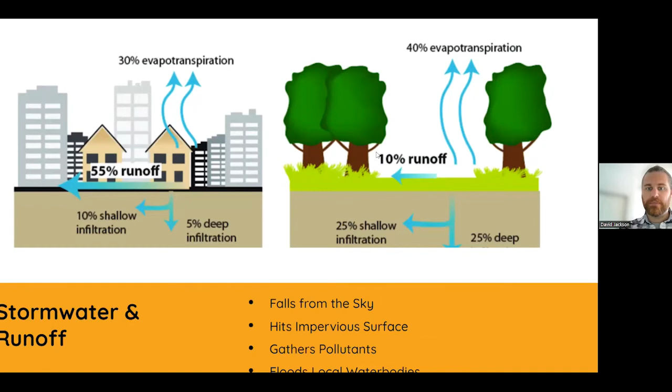We're going to talk a little bit about how rain, which you would think of as really clean water, leads to water pollution and issues with our fish habitat. Right? Okay, so as I was saying, we're going to talk about water quality, and we are going to talk about how rain, which you would think of as extremely clean water, does contribute to a number of issues, including pollution and degradation of our waterways.

There's sort of two general models for what happens when rainwater hits the ground. It shouldn't come as a surprise to anyone that water falls from the sky. That is rain. We collectively call any kind of precipitation stormwater. So that is hail, sleet, snow, rain. Doesn't matter if it's a light drizzle, if it's condensation from clouds, or if it is a very intense downpour.

If it strikes a natural system, there is very little runoff. Runoff is what happens when water moves sideways as opposed to either being taken up by plants or going into the soil. The majority of water goes into the soil in a natural system. A small amount goes over the ground, usually where it eventually sort of runs out of speed and then is absorbed by plants. A large amount goes up through evapotranspiration. Evapotranspiration is a very fancy word to say it is taken up by plants or it is released into the air.

If you have any questions on terminology, I will try to explain them as I go, but if anything is unclear, please do go ahead and ask. I'm happy to clarify any of these terms.

David, before you continue, if you could speak just a little bit louder, it's better than when we tested, but it's still a little quiet. Okay, I will do my best. And if my neighbors complain, everyone on this call has to be my ally. Online is really challenging for me because I can never tell if my jokes land. And that is really the biggest challenge, I think we can all agree, of the last few years.

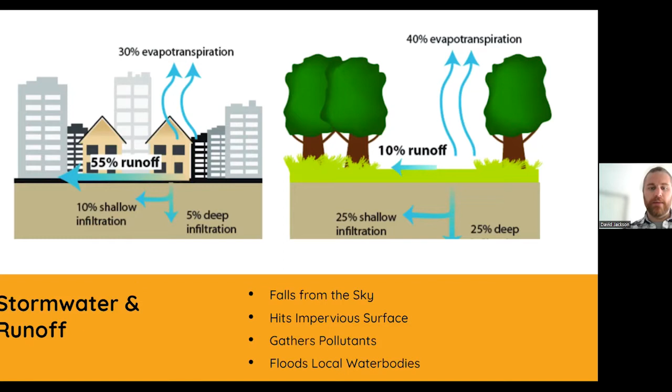All of these also carry certain pollutants. These can be feces from dogs and pigeons. This can be oil or tire rubber from your car. It could be sidewalk chalk. It can be any number of things. But as the water moves across the surface, it picks those elements up and then it deposits them in local water bodies. So to go in a little bit further, in an undisturbed watershed, this is a better model.

And you see a large amount of evapotranspiration, the majority of water going into the soil and a small amount of surface runoff. We want that, but we specifically want the water to move through the soil and the subsoil, and enter what's called the groundwater. When water gets down to the point that it's deep soil or shallow soil water, that means that it is still going to enter these waterways and recharge them, but it's going to do so while it's moving through soil.

And as you see there, soil has a lot of stuff going on in it. For the sake of water quality, what it means is that the stuff that's going on in there is cleaning it. The soil, just the physical structure of the soil itself, the insects, the invertebrates, the detritivores, they're all cleaning the water before it enters a water body. It goes into the groundwater, it gets cleaned, and then it enters the water body. Once it enters the water body, the stream or the lake that's there, it means that it's a better habitat for the fish that we're trying to protect.

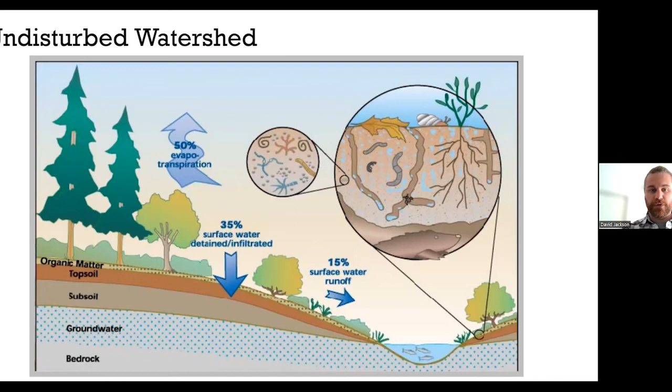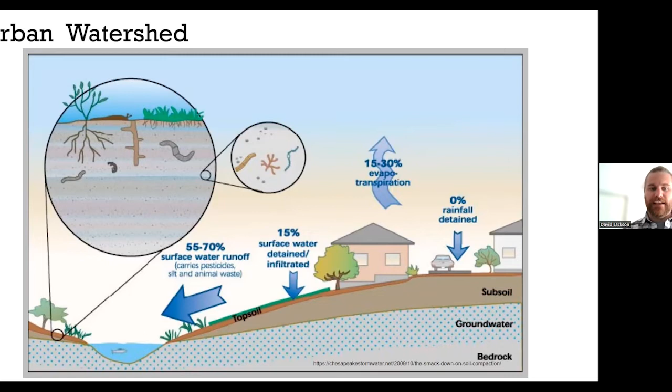When that doesn't happen, the majority of the water that is entering the water body is doing so through the surface. It's not going into the groundwater and recharging, it's going over the surface and directly into the water body. When that happens, all of those pollutants that we talked about just a second ago are being carried with it into the water body. And there's a number of different pollutants and types of pollutants that we're going to talk about, but all of them have different negative effects. And even small amounts overall lead to negative impacts for fish habitat.

So stormwater has a lot of problems, and I'm not trying to bum you out, but there's sort of four major ones that I want you to hold in your head when you're thinking about why does it matter that we manage stormwater. The first one is flooding. This occurs when there's just no place for water to go. Storm systems can get overwhelmed. They're essentially gray pipe systems. And if they get filled up, or if the water reaches a point that they can't flow out, you're left with serious flooding. This is something that we are starting to see in this area more and more, especially as climate change means that we have a much wetter wet season and a much drier dry season. We don't have the snowpack as much. We have a lot more heavy flooding events.

Soil erosion is exactly what it sounds like. It's when a lot of fast moving water starts carrying soil away. This is another reason that we want water to go into the soil and move laterally through the system. When it moves over ground, if the ground isn't held in place by grass or plants or some other system, it will just carry that soil with it. We have a saying at SCD: water always wins. If you don't believe us, ask the Grand Canyon.

Water is really great at moving large amounts of soil, and large amounts of soil in our waterways is a real problem. In addition to pollution, it also means that bluffs come down. And the vast majority of this state, or at least this side of the mountains, seem to be built just right on bluffs that are being eroded. Pollution, as we just mentioned, here's a very dramatic picture of a lot of oil and things going into storm drains.

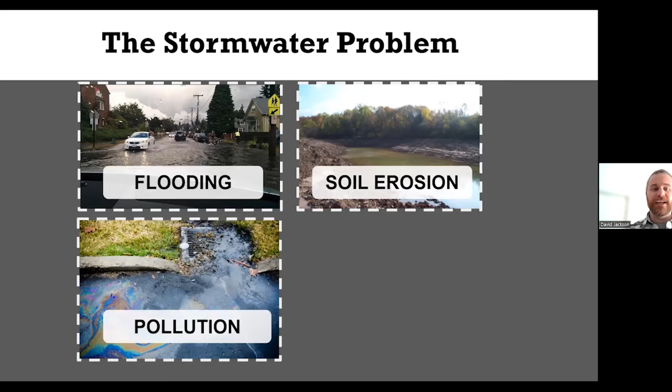That's probably something we're all used to seeing. The problem is that storm drain, there's probably not filtering between it and a water body. So whatever that water is carrying, it's going to end up in a fish's habitat.

And then less groundwater. This is more of an issue east of the mountains, but this is still an issue for a lot of our farmers over here, who we very much want to support because they're growing food for us. The more runoff we have, the less that recharge effect I was talking about earlier. And the less recharge, the less groundwater, meaning it's harder and harder for wells to work and irrigation based on wells to work.

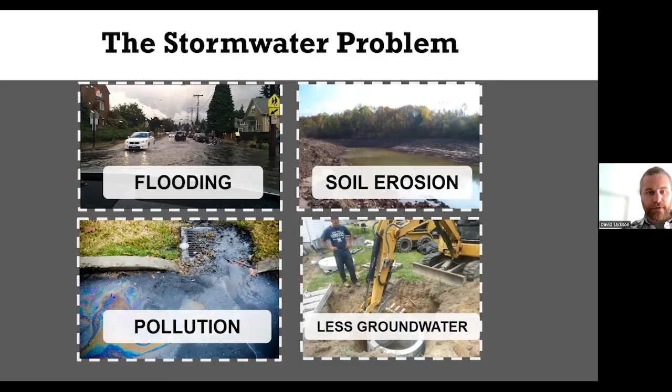So that's a lot of bad news and a lot of bummer stuff. But we're going to talk about a couple of things that you can do to actually help solve this. So it's not all gloom and doom. The first one we're going to talk about is green stormwater infrastructure. This is commonly shortened to GSI.

This is a way of mimicking a natural watershed in a very, very small area. You're not trying to completely reforest a town. You're trying to concentrate the same effect that a forest has in a very small area. You commonly probably know these as rain gardens. You also might know them as bioswales. There's a lot of them out here in the state.

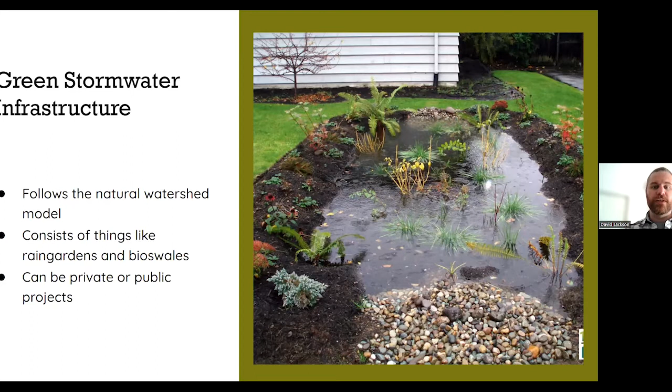These can be private projects. They can go on in your yard, or they can be public projects that happen at a municipal or even a state level. We're going to talk about the stages of construction because I think what a lot of folks are here to talk about is not necessarily just how a rain garden works, but specifically how to put a rain garden into practice.

The first thing that you're going to do is you need to excavate, then you're going to backfill, then you're going to add wood chip mulch, and then at a later date you're going to do planting. And I'll talk about why that happens later.

There's an old joke that we used to say when I was a private landscaper about government work, which was bring in the ditch digger and the ditch filler. This is actually more or less what we're doing. You're gonna dig down to a certain level, and you're gonna backfill it with soil. But you're gonna backfill it with different soil. And when we get to the backfilling section, I'll talk a little bit about that soil and how it works.

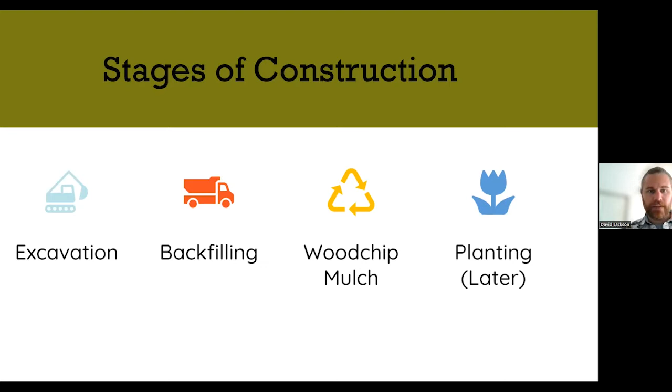And then you're gonna add a protective layer of wood chip mulch. There's a reason we use specifically wood chip mulch that I'll get into there. And then the planting is also very specific. So excavation. This is what we call the typical bean shape of a rain garden. There's not a really good reason to make it this sort of figure eight or infinity sign, but this is a very common shape just to help make it look natural.

You'll notice that this is a fairly deep hole. This is about, I'd say, maybe about 24, 26 inches down. And very critically, you'll notice that the soil changes color as it goes down. You want that. The reason we want that is because we want to get the garden low enough that when the water enters it, it's bypassing a lot of the topsoil that may cause it to pool laterally. And instead, it's trying to infiltrate down into the soil.

So we're trying to fast track the infiltration process by getting the water down to the base soil as fast as possible. You'll also notice, if you can, that the texture of that soil seems very loose. You want the bottom to be a little bit scratched up.

Same thing as getting it low. We want the water to be able to infiltrate deeply into that soil very, very quickly. You're also going to notice that there are two trenches at either side. Those are for the downspouts. In fact, you can see on the right one, they're up at the top. You can see where the downspout ends, right above it.

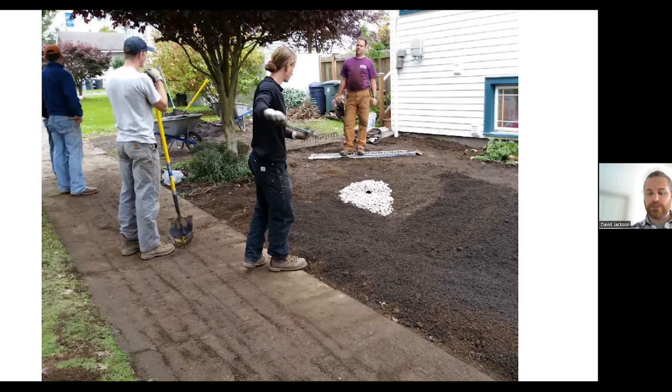Now you notice the white splotch that's there. The pipe I was telling you about earlier, that's where it ends. The rock is around that pipe to protect the pipe from plants getting in, from weeds getting in, but also to act as a kind of energy dissipator, so that when water enters the downspout and flows through the pipe, it hits the rocks first and it slows down, and then it seeps into the garden instead of rushing into the garden and possibly disturbing the soil. So that's the backfilling step.

After the backfilling step, we cover the whole area with wood mulch. You can see again those two outlets. The rock has been washed now. I think this is right after a rain event, actually. And you'll notice that there's a dark area around the middle of the pond. That means that the pond is wet and is currently holding water, and the water is in the process of infiltrating. So this is a garden without plants. Don't worry, it doesn't look like this all the time. But this is a garden without plants, and it is already doing its job.

This wood chip that we use is a specific kind of wood chip called animal safe hog fuel. It is also approved by Department of Ecology.

I was about to make a joke about, I promise I'm not paid by Department of Ecology, but I absolutely am paid by the Department of Ecology. I am here doing this presentation because I'm paid by the Department of Ecology.

So we tend to use their products, but their products are also just the best for this. I can get into a lot of detail as to why we use this specific mulch. If anybody's interested, I'm happy to answer questions about that. The bottom line is that it is the best version of wood chips to use for this process. And if you want to use something else, you have some things you need to consider.

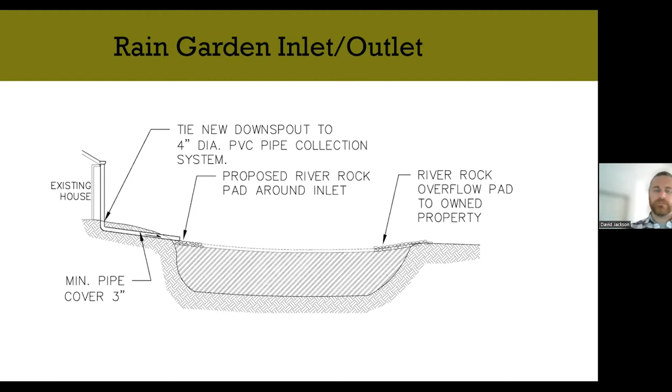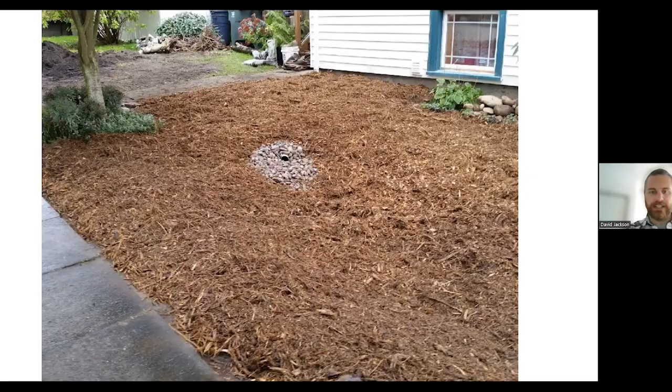This is a closer shot of the inlet that I was talking about. And again, the rockery is here to both protect the inlet, but also to make sure that the energy dissipates as it's coming out. There's also a little bit finer detail you can see on the wood chips and how they sort of form that mat so that they don't move. You're gonna have a really hard time pulling one of these strands of these wood chips out of this big pile because they're all interconnected in this matrix.

A couple things to note about offsets for anybody who's actually going to be doing this work. You want them to be 10 feet from buildings, 5 feet from utilities, 50 feet from a slope, and you want them to be outside the crowns of trees. I mention all of that because very commonly somebody asks us for a rain garden, and they've already fallen in love with the idea of putting it in a specific spot. And we get there and it's not going to work. It's too close to the building, or it's on a massive slope, or it's directly underneath a crabapple tree, or, and this happens too, we call 811. It turns out there's a gas line running through the middle of it.

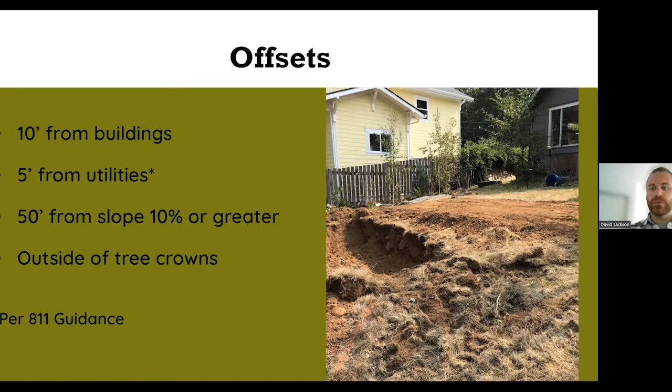So when you're siting your own rain garden, you want to have it away from your house. You want to have it fairly level. You want to keep it out of the right of way because you need to get right of way permits if you do that. You want to keep it away from trees. It needs to be out big and exposed in the sun. You also want the spot to be very dry. And you want to make sure that you have access to at least one downspout that will be able to run from your house directly out to where the rain garden is going to go.

David? Yes. Sorry, quick question before we get to the question answer break. One of our attendees is asking if you could talk a little bit about bioswales before we get to rainwater catchment.

Yes, I'm going to talk about a bioswale in the context of this picture you see here on your right, because they are almost functionally identical to rain gardens with a couple specific changes. A bioswale does not necessarily have an inlet or an outlet. What it does have is a slope. You're still excavating, putting in bioretention, putting on wood chips, and putting plants in. But a bioswale is not meant necessarily to hold all of the water in place. A bioswale is meant to infiltrate water while it moves it somewhere else.

So the most common version of a bioswale that you'll see is a drainage ditch, which I think we're all familiar with. Water comes in and sloshes sideways and goes on down its way. Retrofitted, you excavate a few inches down, you put down bioretention, you put down wood chips, you do some planting, and now instead of that water moving very fast and discharging somewhere else, the water enters the bioswale and infiltrates as it is moved off to its next place.

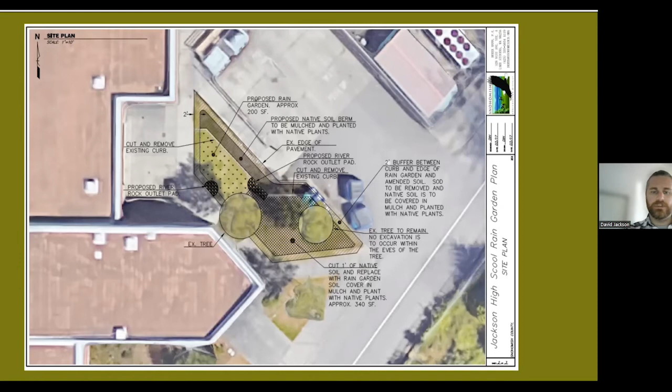So now we're going to move on to rainwater storage. Rainwater storage is kind of not really the opposite, but it's a very different way of handling stormwater. GSI is about getting rid of stormwater and putting it back into the natural system. Rainwater storage is about hanging on to stormwater, treating it ourselves, and using it for different things. The most common version of this is rain barrels. I think a lot of people have seen rain barrels. We're going to see some in this presentation, but they are kind of the dollar store version of stormwater catchment.

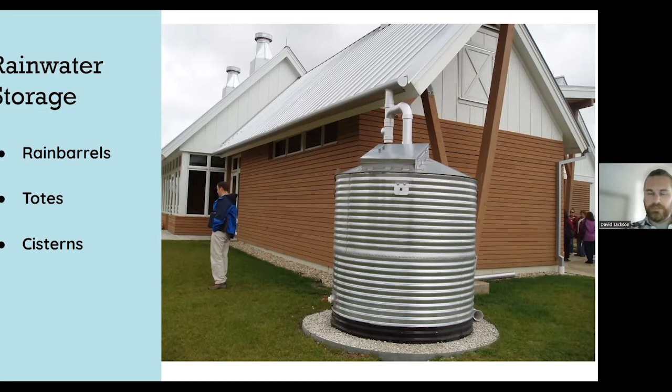Totes are a little bit different. You may have seen IBC totes. They're larger, they stack. Some people find them really cool looking. Some people think they look terrible, but they're kind of the next step up. And then there's cisterns. This is an extremely expensive cistern. These sort of systems are now very expensive because they're very trendy. They also look incredible. But a cistern is basically any system about 500 gallons and up. They can be above ground, below ground. There's just kind of no end to them. They can be fairly inexpensive to bespoke, absolute monuments to money in certain cases.

The three main elements of using rainwater are how much you're going to use, when you are going to use it, and how much head pressure you're going to be able to generate to use it. The amount has to do with the size of your system, but also the size of your capture area. A lot of people want to get a really big system, and they go, "This is great. I'm gonna get this enormous system," and they don't have enough capture area to even fill the thing up halfway. The amount of capture area is basically your roof.

And I'm going to dispel a very common myth about rainwater collection right now, as I do very often: you are absolutely allowed to collect rainwater. It is not illegal to collect rainwater.

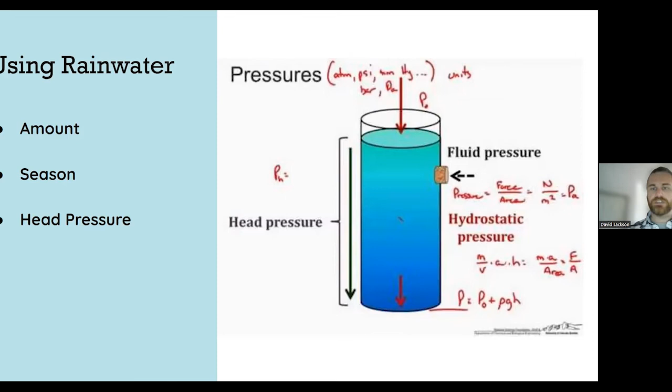Now, if you need to maintain pressure, there are ways around it. You can get a pump, you can get a solar pump. They're inexpensive and very easy to maintain. But a lot of folks don't want to do that. They want to work entirely off head pressure. You just have to remember higher is better, more weight is better. So here are some of the blue barrels that we were talking about. These are rain barrels. This is not how I would install this system, but it's a pretty good system.

These barrels are set up in what is called battery, as opposed to in sequence, meaning that they will all fill up together at the same rate. I can explain why that is and how that works if anybody is interested, but this is a very good way to improve that head pressure we were talking about. Your head pressure is going to be consistent across all of the barrels, as opposed to filling one up, filling the next up, filling the third up.

You'll see the downspout diverter on the left that's coming down into the barrels. That's a very similar principle to diverting your downspout into a rain garden. It's just going into the barrels instead. Right next to that, you see the overflow. You'll notice that at the very top of that barrel is where, if it hits that point, then the water flows back out of that pipe. You want your overflow as high up as possible because you want to capture as much water as possible.

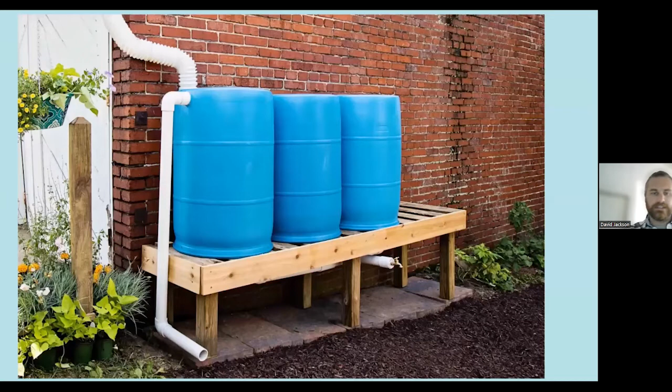And then you can see they're connected down underneath the wood structure. And then you have a spigot there, which has hose threading, so you can just attach a garden hose to it and go from there. It's a fairly common kind of setup for rain barrels. We do ours a little bit different, but in general, this is more or less how it works.

So when should you use your rainwater? When do you want to be using it? You want to use it in the summer when it's not raining. You want to use it on dry days. You're kind of in an on-off situation. If it's raining, your rain barrel system is tied up and you are saving water. If it's not raining, then you are draining water down. There's not really a reason to be using your rainwater when it's raining.

I guess if you had a system that wasn't reached by the rain, but in general, you want to use it on drier, hotter days. And then you want to do it whenever you want to save city water, whenever you don't want to pay for municipal or county water. For your garden or your greenhouse or any of the other permitted uses.

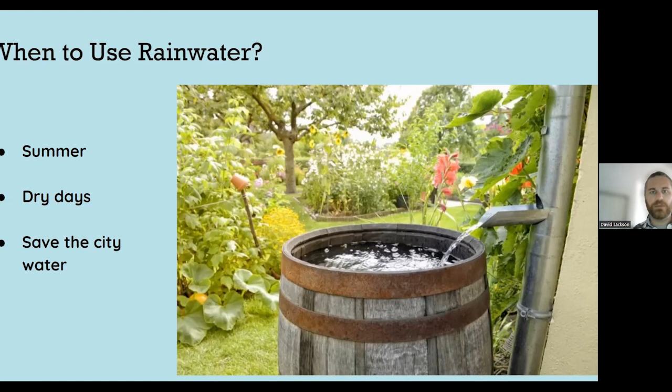So we're going to talk about stormwater filtration. This one, I'm going to tell Allison to interrupt me because this is very much a Snohomish thing. So I'm going to talk about what I know, which is the Snohomish rules around stormwater use. Allison, if I'm wrong about any of this for Whidbey Island, please jump in and tell me so I'm not giving these lovely folks wrong information.

Your rain barrel already has a good amount of filtration built into it. If it's coming from us or from most other places or using resources that we have, it has a grate filter, G-R-A-T-E filter. It's great, it does its best. But it has a grate filter underneath where the downspout comes in. That keeps large debris like leaves and things out. And then it has a gap.

All rain barrels should have a gap between the bottom of the barrel and the faucet, and that is called the sump. Some folks may know the term sump pump; this is sort of where that comes from. The sump is an area for any contaminants, sediment, things like that to settle at the bottom of a containment device. You want that to happen because if your water is coming in and it fills up, the heavier particles are going to settle at the bottom, and then the water that comes out of the tap is going to be cleaner.

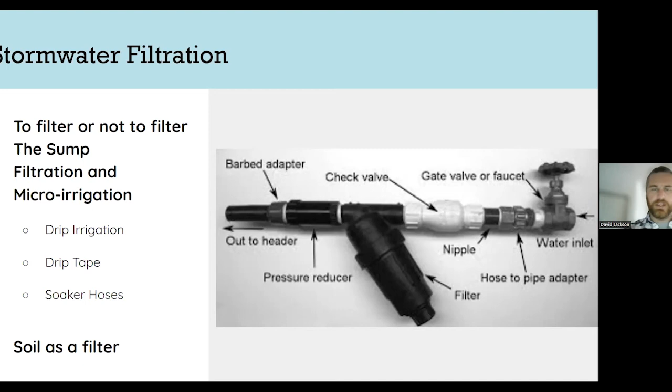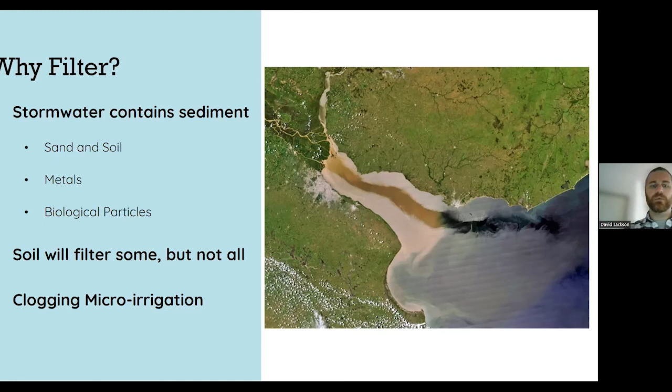So why should you filter? I see we're running out of time, so I'm going to move really quickly. Stormwater contains sediment. Sediment is all sorts of soil, as well as metal and biological particles like the fecal coliform we're talking about. The soil will filter some of it, but not all of it. And as I said, it will clog your micro irrigation.

The last thing that I'll say is I don't want people to panic. I'm not trying to scare anybody about filtration. The soil does a very good job. If you're not eating any of the stuff that you're using, or if you aren't using it on animals, you really don't need to worry as much. It's not something to be worried about, and there's lots of very good research out there.